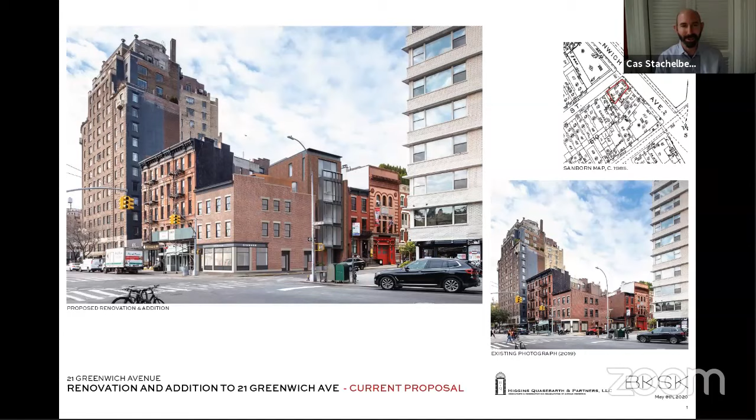I'll take you through a little bit of the background, and George will share with you the revised design. Joe Hogan is advancing slides, so you'll hear me saying next as we go through this. Joe, I'm ready for the next one.

Just quickly, a few images of the existing building on the corner. As I said, a three-story Greek Revival row house with a really fascinating stepped parapet across the top of the 10th Street elevation. The image in the middle of the back of the building shows the one-story extension, which has been changed multiple times.

The extension began as early as the first decades of the 20th century, and then under commission review, various storefronts through the last half of the 20th century. Mechanical equipment and ductwork run up the back of the historic building, which at the time of the start of the project had been coated in an asphalt roofing cement. And then a long view looking west along 10th Street toward the Greenwich Avenue facade.

Next, some detailed photos of the facade. As I mentioned, there's a comprehensive restoration program, new wood windows, repairing and restoring the wood cornice. The photo on the upper right shows an interesting detail with bluestone, granite, and sandstone lintels, which of course will be retained, so an unusual treatment.

Then across the ground floor, a restoration project for a new wood storefront, stripping the paint off of the granite piers. And the photo on the lower right indicates this low door on the far right edge of the 10th Street elevation, which we propose to raise up to match the height of the adjacent doorway.

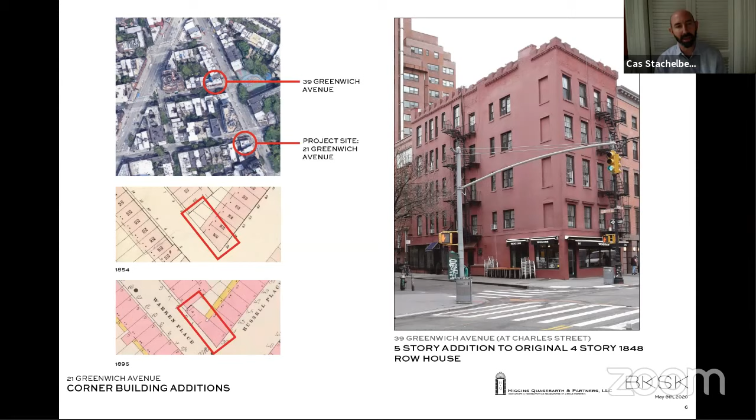Next slide. We shared with you also a series of images of commission-approved infill buildings throughout the district, which in most cases included demolition of 1- and 2-story structures, garage buildings, theaters, or residences. We share these with you to show the range of materiality - masonry, metals, glass - and the way the fenestration is handled, some small scale akin to adjacent properties, others with much larger window openings across the facades.

Next slide. Returning to our project: on the left is an image from our October presentation showing our original proposal, and on the right, our revised proposal, addressing a few things. One, the visibility of the addition and minimizing that, as you'll see in the sightline studies. But more significantly, we've studied the materiality of the new building, the addition, and also the relationship to the historic building at 21 and to the neighbors. With these revisions, we think we've arrived at an appropriate infill for the district.

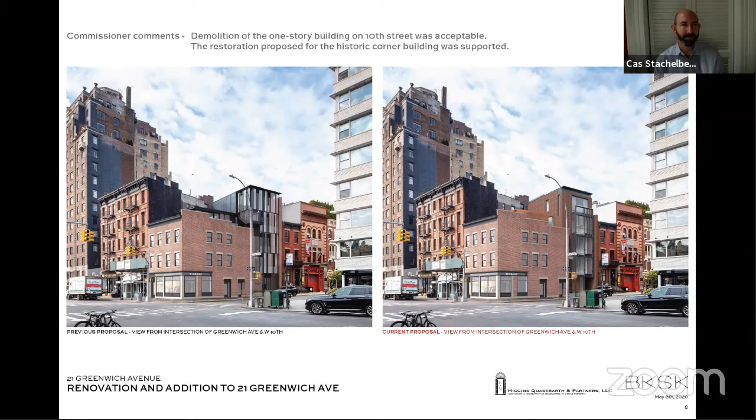George? Am I unmuted at this point? Yes, you are. Thank you.

My name is George Schieferdecker, and I'm with BKSK Architects. I'd just like to point out that Harry Kendall from BKSK is also on the call, and hopefully at the end of this, we can unmute him and ask him to comment to see whether he has anything else to say.

The 4 categories of comments we heard in response to the original proposal were, as Corey mentioned: scale - addressing the appropriateness of the proposed scale; separation - a distinct preference for having the infill read separately from the rooftop addition to the historic building; and materiality - the commissioners had a distinct preference for more masonry in the infill section. I think these first 3 comments are often intertwined - materiality and lack of separation can have a bearing on the perception of scale. In our last presentation, one commissioner felt the scale of our infill building would likely be acceptable if its materiality was altered.

So we have made a number of changes to the design in that regard. In place of our continuous 5-story metal and glass screen from the previous proposal, we have proposed a metal and glass bay window on floors 2, 3, and 4, with some minor detailing tying it to the ground level. In place of the predominantly metal language of the previous proposal, which tied into the metal language of the addition on the historic section and included the sidewall of the infill building, the bay window of the revised design emerges from a predominantly masonry mass and includes a brick sidewall in a more contextual lot line typology.

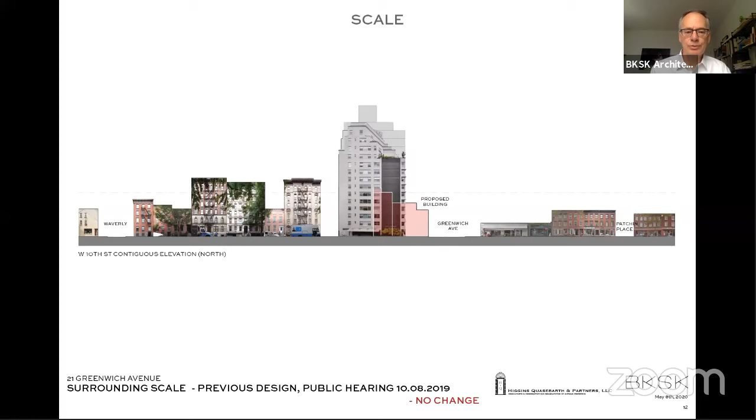Joe's going to quickly flip between one image and another to indicate some of the things we're talking about and the changes that have wrought. By flipping between the next two slides, we can sense the changes made to the design and their impact on the scale of the building relative to its immediate surroundings, and between the historic portion and the infill portion of the design. The basic mass of the building is set further back, and the appearance of height is lessened. The addition of the lower bay window modulates between the historic portion and the scale of neighboring buildings, and the removal of the overhanging metal and glass stair enclosure allows the historic volume to be more clearly articulated.

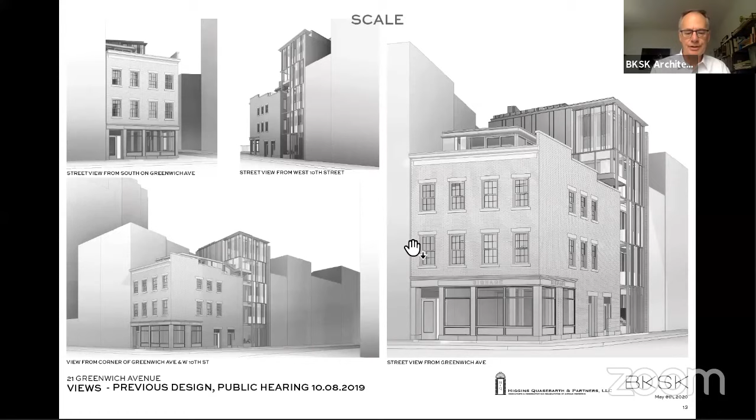Also, if we can take a moment to look at the rooftop addition as well. We're going to talk about visibility a little bit later, but I think it's also clear in this flipping back and forth that the changes we have made make that less apparent from the street.

I wanted to move on to materiality and separation with a brief preamble. Ornamental and utilitarian metal on the front face of buildings is ubiquitous in the village. It takes the form of railings, fire escapes, and balconies. The presence of bay windows of a contrasting material to their backgrounds is commonplace. The presence of a contemporary vocabulary is also present, very much in keeping with the eclecticism of the village.

And the occurrence of a bay window modulating between street planes can also be seen. So our bay window fits into all of these precedents and takes a cue from each one.

On the left is our previous proposal, on the right is our current design from a different angle. As before, the units are full floor on 2 and 3, extending from the infill section to the historic section, and a duplex apartment is on the top 2 floors.

The bay window occupies the right two-thirds of the facade of the infill in order to create what we call a reveal or indent between the infill and the historic portion. This reveal leaves the original diminutive volume of the historic portion clearly articulated by recalling its original rear wall and exposing its rear corner.

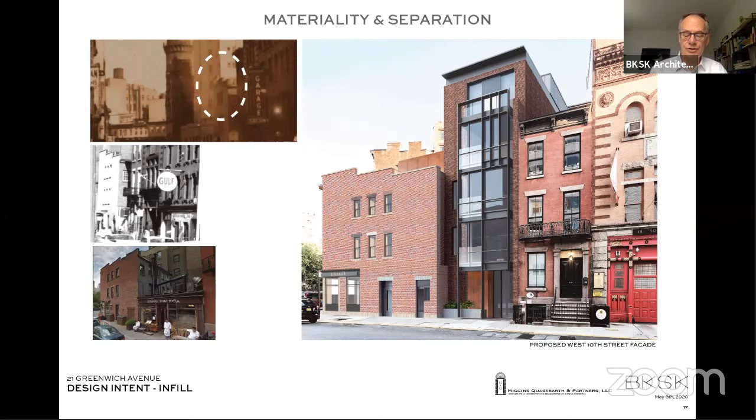The historic facade on 10th Street has always been of interest to us as an unusual expression, with its very prominently stepped parapet. In some of the historic photos, that stepped facade appears to extend up above the rear wall, and the rear wall is defined differently, either by a parging or simply a shadow line, resulting in an expression of the side wall as a simple plane of brick. In other historic photos, the middle one in particular, the emphasis is on the return of the brick on the rear wall. We have chosen to express both conditions at the corner of the historic portion.

The bay window of the facade is the canopy for the entrance at the first floor, an extension of the living room of the units on the second and third floors, an extension of a bedroom on the fourth floor, and a balcony off of the master bedroom on the top floor.

On the second, third, and fourth floors, the glass section to the left of the middle is a door that opens inward, with an acid-etched railing sitting outboard by about 3 or 4 inches, carrying over to the left edge of the bay. The right side of the bay is floor-to-ceiling glass at the second and third floors, and an acid-etched sill level with vertical fins at the fourth floor for greater privacy, where the bay is part of a bedroom.

On the back wall at the very top floor, there are two glass panels, left and right, and a solid spandrel panel in the middle.

The bay appears to be pulled out of the masonry mass of the building, and the masonry return at the bay is metal, matching the profile of the surround at the leading edge of the bay. That framework extends to within a few inches of the ground to create an entry zone. The bay also pulls back from a brick fin wall at its western or right edge, making it clearly a 3-sided glass box with space to either side, putting anyone standing in the bay fully outside of the main mass of the building.

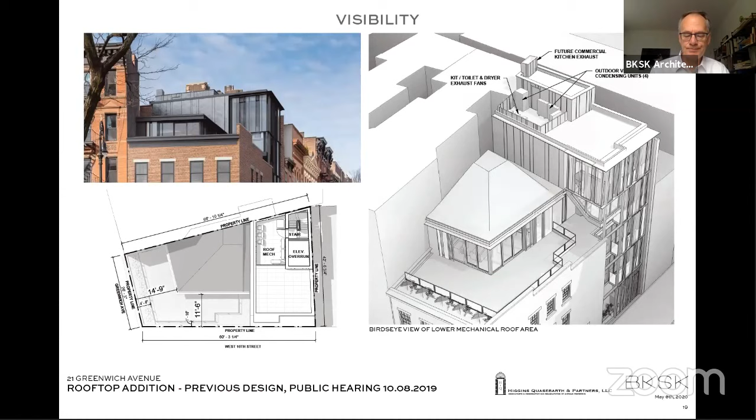The previous proposal had turned the corner with glass and metal and opened up the infill portion to the rooftop addition. The current proposal creates the equivalent of a masonry lot line condition with limited openings. This move responds to a preference for more brick on the infill and more separation of the historic from the infill, so that the infill reads more like a separate building than an addition.

The brick of the infill portion was deliberately chosen to be at variance with the existing brick of the historic portion—it's a deep red-brown molded brick. The metal work of the bay is a charcoal gray toned metal with a substantial fin expression at the bay window, giving it a similarity to the thinness of steel. The side of the rooftop addition is copper, meant to be patinated to a deep bronze tone. While the previous proposal sought to unify the rooftop addition with the infill, the current proposal emphasizes separation between the two, materially as well as volumetrically.

The only nod to the buildings being tied together in plan is a repetition of the patinated bronze-toned copper of the addition at the side of the entry to the residential portion of the building. Other materials shown include the granite at the base of the building and at the planter by the entry, the acid-etched glass at railings and certain glass surfaces, and the metal panels, including the metal panel of the bulkheads.

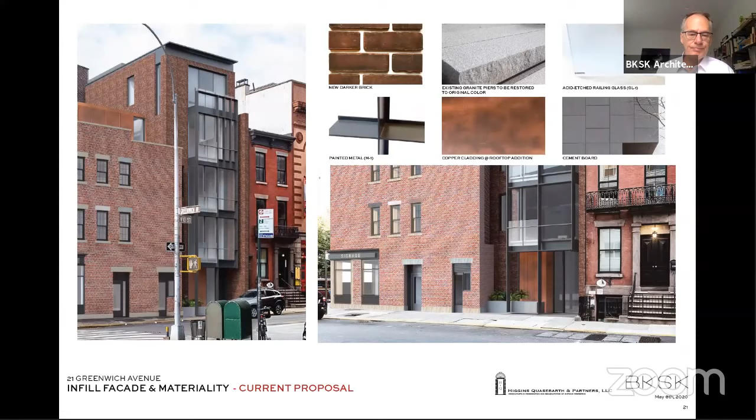Following other views of current and previous schemes—from the south on Greenwich Avenue, the rooftop addition is less in evidence in the current scheme, as it has been set back further.

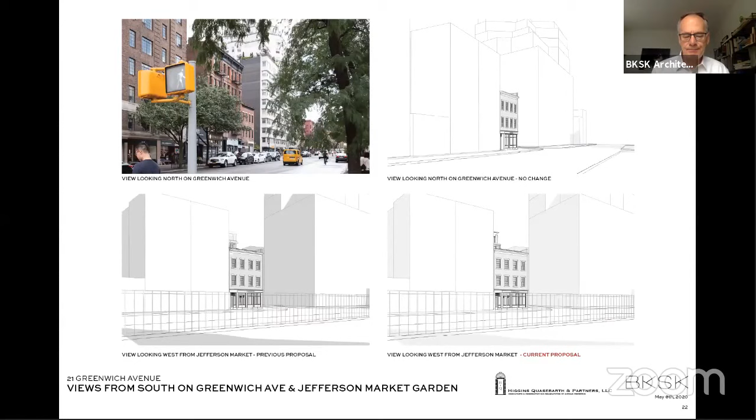From the east, the rooftop addition appears lower because it is set back further. The current proposal also shows its brick lot line wall.

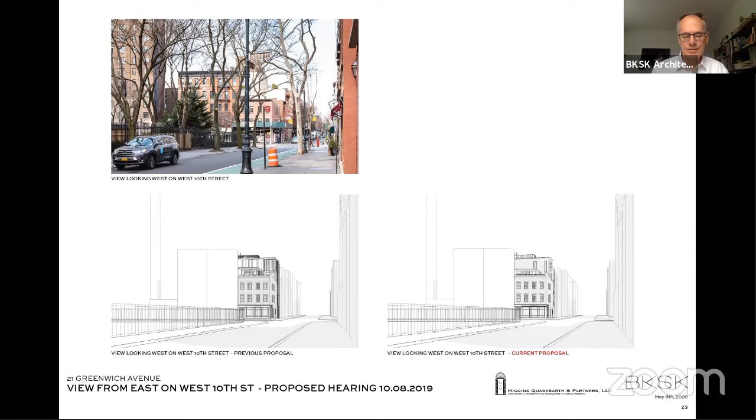In conclusion, what we have done with our current revisions is address the commissioner comments about scale by breaking up the volumes of the facade and reducing the impression of height by setting back the main volume of the infill, while maintaining the 5-story height of the infill, which we feel is well within the scale of the context. Separation and materiality by preferencing the reading of the infill as a separate building with a lot line condition, giving it a predominantly masonry appearance with a different tone brick from the historic, and allowing the volume of the historic portion to assert itself. And third, decreasing the visibility of the rooftop addition by increasing its setback from Greenwich Avenue and simplifying its form and material expression.

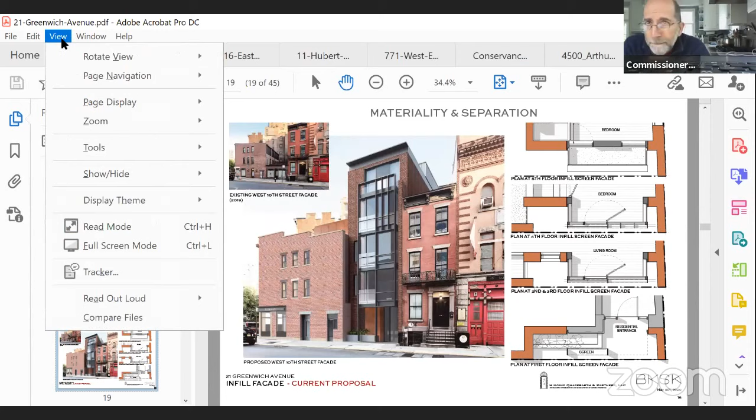So can you just go back to the plan view of the balcony detail? I just want to understand your intention with the relationship between the balcony element and the townhouse to the right, the west. So it's set back a little bit from the townhouse to the west, right? Yes, that's correct.

Okay, so as I'm looking at it now, I realize that there's one slight mistake in that plan, and that the brick fin wall to the west appears to continue up, but it does not go up the full height of the building. It only continues to the level of the balcony. Right. This question occurred to me now.

It didn't in a previous scheme, because that scheme is quite a bit more contextually intending to be contextual in a more, I guess, traditional way. What set for you the plane of the brick in your proposal? Where did that plane come from?

The plane of the brick was both set back so we would get a kind of dimension that allowed the corner of the historic building to read, that the sort of balcony and bay window depth appeared reasonable, not overly sized, but enough to be sufficient expression. So I think it's those dimensions that essentially set that back, those thoughts.

Okay, and last question: your rooftop addition, looking at it in light of many other rooftop additions, is relatively opaque on the 10th Street side. Explain to us why you made that decision and why that's a good thing.

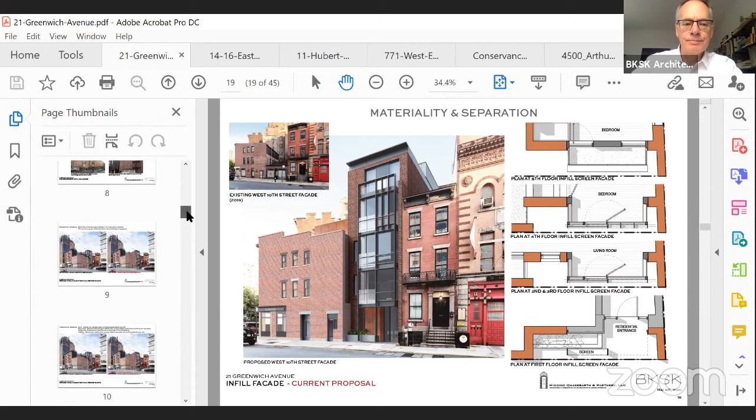Okay, and finally, if you go to your south elevation - well, we literally don't have a south elevation, we have an east elevation. There's two - the front, you did a lower one. You had an elevation looking south that showed your building with the whole block. Yeah, you're talking about the corner perspective image from the corner. It's a line elevation that you drew, a block and the building's elevation, were in white. Oh, a block elevation? This is it, there it is.

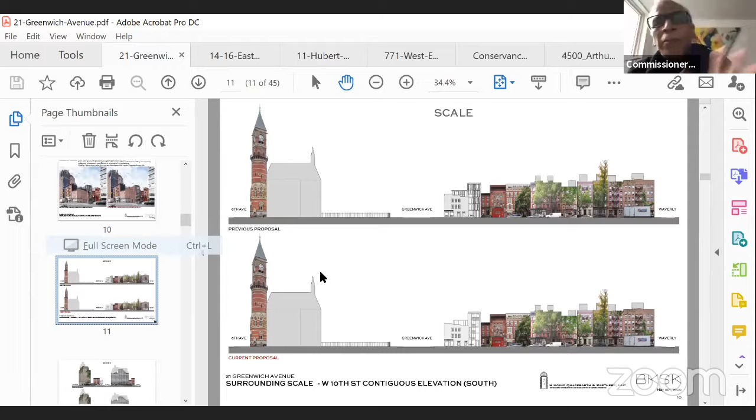And the question there - I think this is really much improved. I was just feeling you have a volume in the corner, you have the volume infill. The connection on the roof seems to belong to neither. You have A, B, and C, and I'm wondering why the penthouse doesn't relate to the historic building more precisely. So you have volume A and volume B - what's the idea of the overlap that we see in the elevation? You see the ambiguity between, it becomes a third element, if you will.

Well, I think that many rooftop additions in the village end up being either studio or bulkhead-like, and generally of a slightly different quality than the main mass. I think what we tried to do essentially was, when we look at a head-on elevation, obviously we see a lot more of it than we would when we're looking from the street.

In the street views, we simply wanted to make it discreet, set back. And then we liked the notion that it had a very subtle relation to the new proposal and design by taking that material and bringing it down close to the entry - something that perhaps the street observer might not necessarily notice, but certainly our residents would get a sense of as they grew to understand their building.

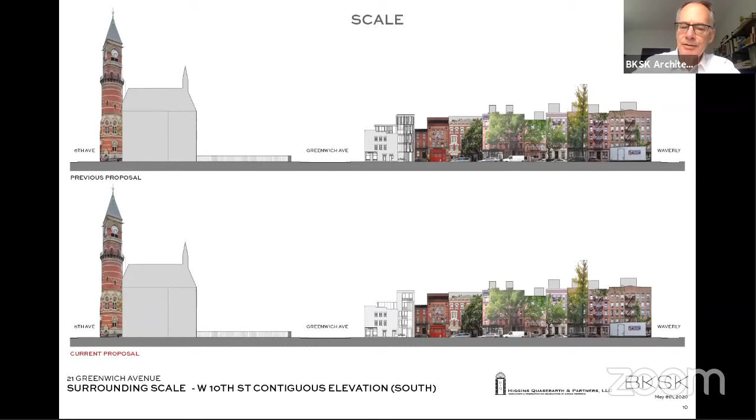I think the main perception from the street would be of the historic building, its bay window which has volume and mass to it, and the brick infill that the bay window comes out from. Those are really the three elements that I think create the overall impression of our building on the street.

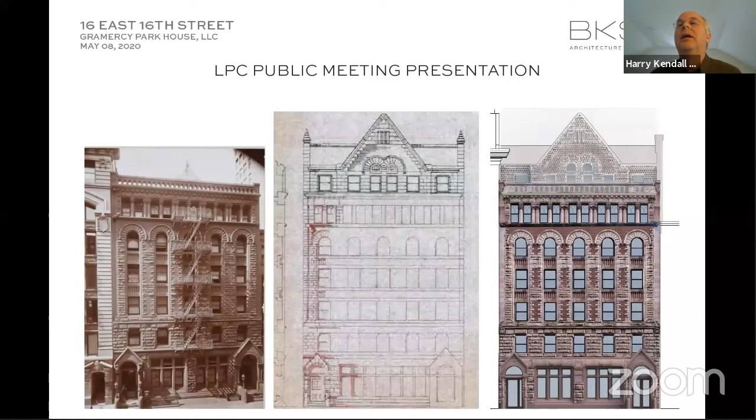Of course, our project also involves the restoration of the ground floor, extensive reworking of the interior, expansion of the building to the rear, and these upper floors that I mentioned. Next, please. Todd will be controlling the computer, so I'll say next when we move to the next slide.

As Corey said, there were a number of commissioner comments. It was a very productive public hearing discussion, and I think you'll see that you've provided us with a roadmap for addressing these issues, and we return to you with a much improved building. We'll start from the ground floor up, but the five topics we've identified that contain these comments are: the ground floor restoration, the massing and visibility of the new upper floors, the overall form and typology of the building, a small but important issue of the neighbor building's cornice, and lastly, the crowning element, the gable screen, the fanciful roof.

We've developed a significantly different set of details, and we're very excited about it. So next, please.

The ground floor restoration - you asked us to look harder at the historic drawings, and we did. So here on this four square sheet, on the upper left you see the zoom in on the historic photograph, one of the historic photographs.

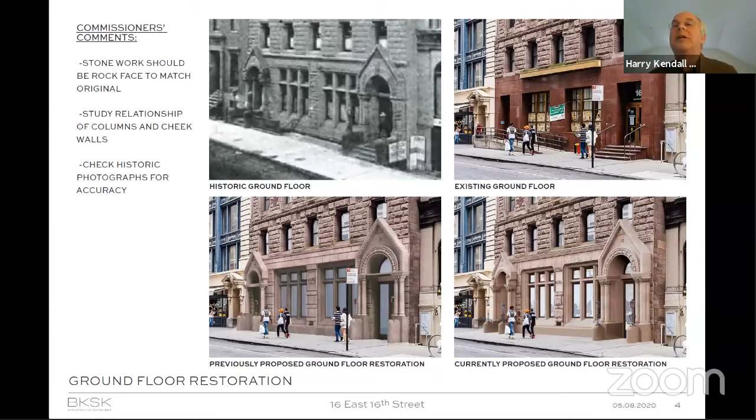So we can go on to the next, which has just a reminder of some of the intricacy and general mastery of detail that the existing stonework has.

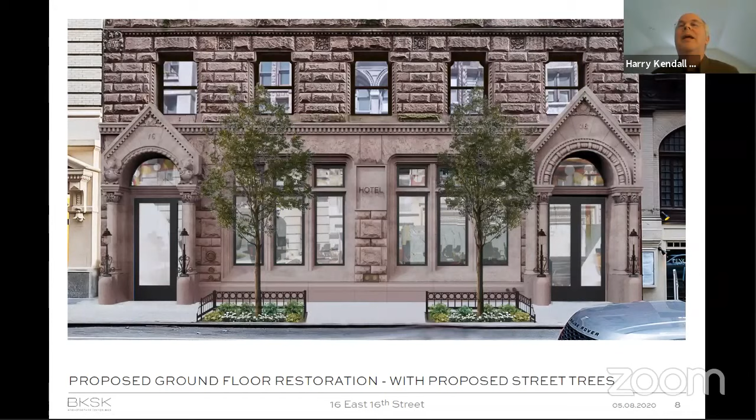And next, you can see the depth and intricacy of the historic facade. We have studied carefully what's there now - very little - but also the photographs, and we think this really accurately reflects its robust masonry presence.

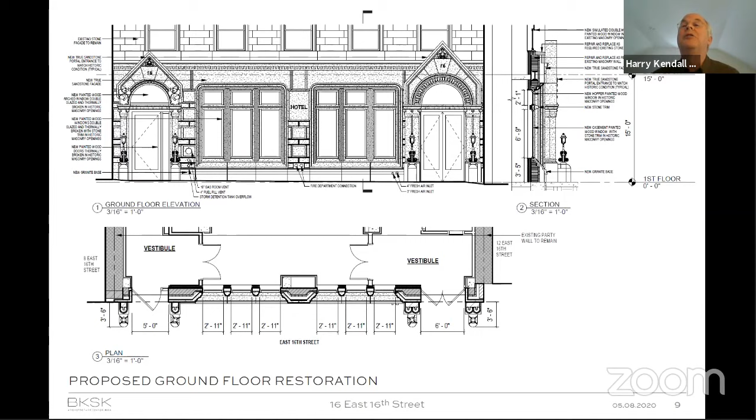So to us, that's the most obvious first step, but an important one, especially if we're trying to honor the mastery of the original architect, both by his composition at the base and his composition at the top, which we'll get to at the end, which Todd will be presenting. So next, please.

The massing and visibility comes next, because you're standing on the street looking at the facade, you crane your head upward and you see the new rooftop. And next, please.

We were asked how we know, because we only have an elevation with a tiny bit of section on the side - it's an incomplete set of drawings, to say the least. We are asked how we know it wasn't a false front, and that it wasn't just the roof and then the building shrunk back down to the size it was built.

Well, we know that in a number of ways. Most importantly, the reason it wasn't realized is because a dormitory wasn't allowed to be more than 6 stories, and he was proposing a 7th story plus an attic, so that's why it got turned down.

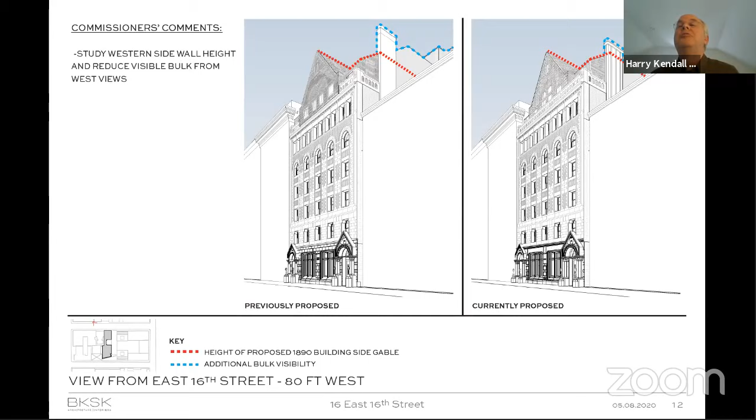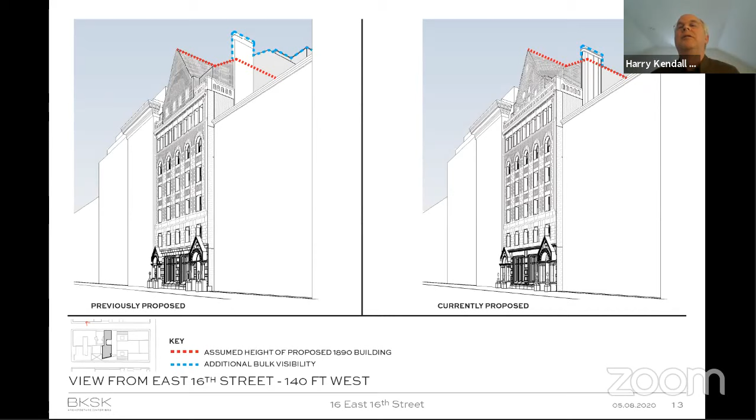As you back away from the building, or walk further down the sidewalk, the visibility only diminishes, as it did in the previous proposal. But the lack of visibility of anything above that presumed bulk line continues, and as you get to the last point of visibility of anything behind the chimney, at 220 feet west, there's no further visibility.

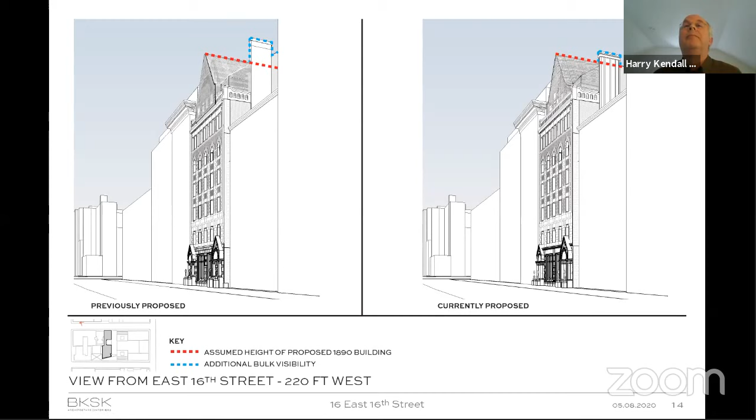To make the bulk sectional drawings clearer, here's the section on the left of our previous proposal. On the right, you can see the reduction of bulk on the side wings of the front face to a 7-story piece in our newly proposed building. It remains 9 stories in the south or left half of the building, and the connecting core is also 9 stories between them.

The mechanical bulkheads and equipment are shown in both these sections, the amount of which is not at all visible from the street. The bulkheads have been lowered, the mechanical equipment has been reduced, and in general this calms the whole composition down and makes it more coherent, we think.

In this next sectional drawing, it's essentially the same drawing, but we've stripped away the mechanical equipment just to show the bones of the building: the 7-story piece, the connecting 9-story core, and the 9-story back portion of the building. We'll also comment, in a minute, on the skylight in the courtyard above a full ground floor.

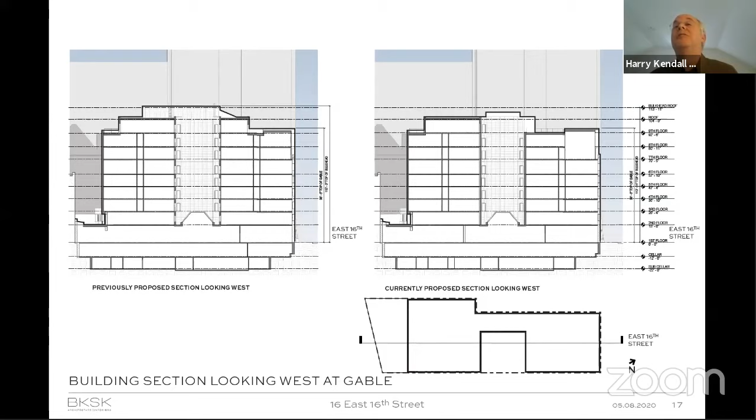There was a comment previously, and Todd will focus on it and show a rendering from that interior, but there was a comment that if going to the effort to create or recreate this unusual element that was in Robertson's mind, it would be good if it provided a special function, and we've found a way to do that.

The third issue relating to visibility, going into a more conceptual direction, is the overall form of the building. One of the most interesting things about the public hearing discussion was the recognition that making a hotel in this historic structure involves a good deal of demolition, expansion to the rear, and additional upper floors.

There was a robust discussion about how much demolition is appropriate, and a suggestion that we be attentive to the typology and formal aspects of how the new building relates to the architect's original conception and to the typology. So on the top, you see a diagram of the original building.

It extends roughly almost 100 feet into the middle of the block. It has a courtyard for the dormitory rooms that is roughly centered on that 100-foot deep block, and it has a somewhat large rear yard, certainly very large for the Ladies Mile district, with a one-story connecting piece to a program element, a single-story building shared with the next door YWCA.

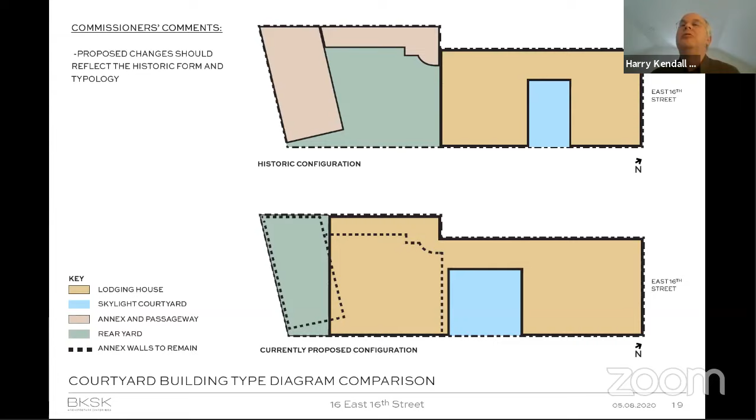On the bottom, you see a diagram of our proposed building, and typologically it is very akin—it just solves a different functional need. So it now extends about 175 feet deep into the block. It has a courtyard that is roughly centered on those two blocks, and the connecting link in the single-story building remains evident inside the building and extending into the rear yard, which is an as-of-right possibility in the proposed new building.

When we speak of a typology, it doesn't just come from a love for a certain typology—it comes from the functional requirements. So this is those same diagrams, altered here to show that the location of the original courtyard, which has a skylight and a full ground floor below it with more public rooms, has a location responsive to the size of dorm rooms and the location of bathrooms that the original dormitory use mandated.

Our proposed hotel has the same configuration, and as was made in the previous presentation, in a way that the health center this building became never did, the front facade will be animated by individual guest rooms reflective of the original design and use. But the rooms have gotten a little larger, the bathrooms connect directly to the rooms as a hotel needs, so it pushes the courtyard back, making it the same functioning element but satisfying a different group of functional needs.

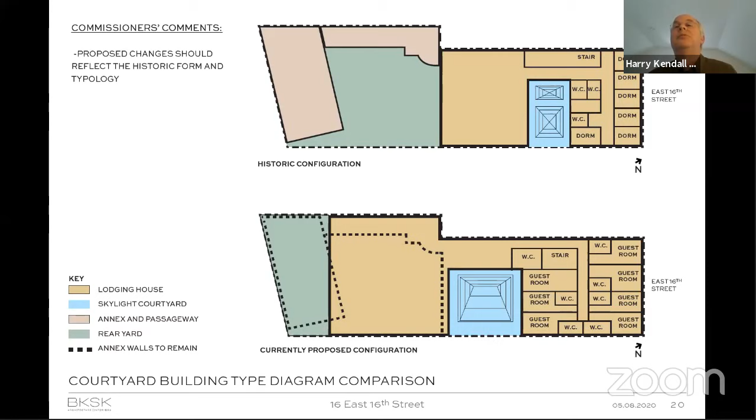Sorry for these pauses. So Harry, I think it's okay. Harry, yes, I think the comment from the commissioners was just to have you discuss a little more about the required removals at the rear. I think everyone understands that the program requires a deeper front and a courtyard shifted back, so if you could just quickly get to the extent of the removals, and then we can move on to the design of the addition in the front. Absolutely, absolutely.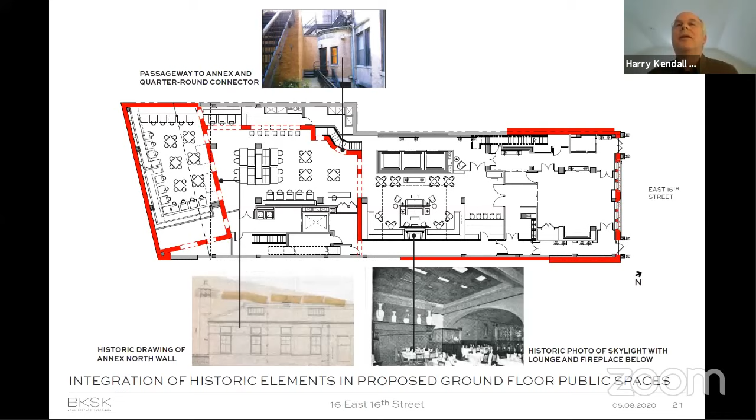These red walls show the elements that are going to be retained. Quick orientation so you understand all this in three dimensions: this image is the original building with its courtyard and the rear outbuilding.

The next slide highlights a number of changes that have happened to this mass over the years, both in the early part of the 20th century and the changes in the 1950 incarnation as the health center. So this existing form has been heavily compromised on the ground floor, but also has a number of additions in the rear.

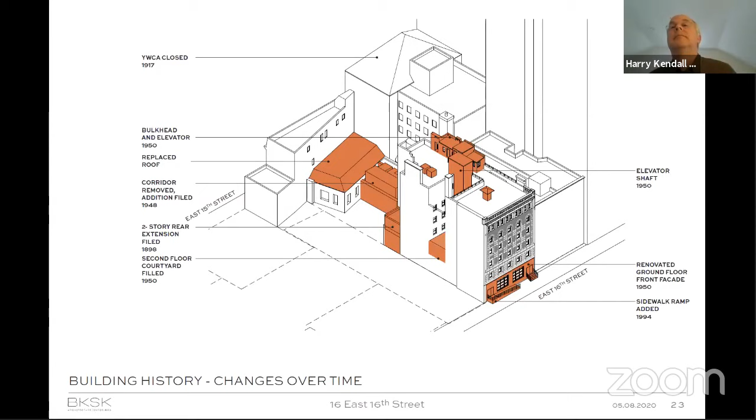And so this now represents in a three-dimensional way the walls we're keeping—of course the front facade, the side walls, 86 feet deep on the eastern side and 45 feet deep on the western side, and then in the somewhat darker gray in the back, these are the walls we're keeping that allow a perception of this progression back through a masonry link to a masonry wall building.

All of which was designed by Robertson. Now, on this drawing, I want to pause for a minute because we know the commission has received some letters in opposition from the neighbor to the east, from the owner and from some occupants, pointing out in their view the inappropriateness of closing the lot line windows. So I want to pause for a minute and look at our neighboring buildings.

First, in the drawing on the left, you see that the YWCA on the upper left, now the Buddhist temple, has a blank side wall with no fenestration, and where they had necessary windows, they recessed the wall to allow those windows to remain sacrosanct.

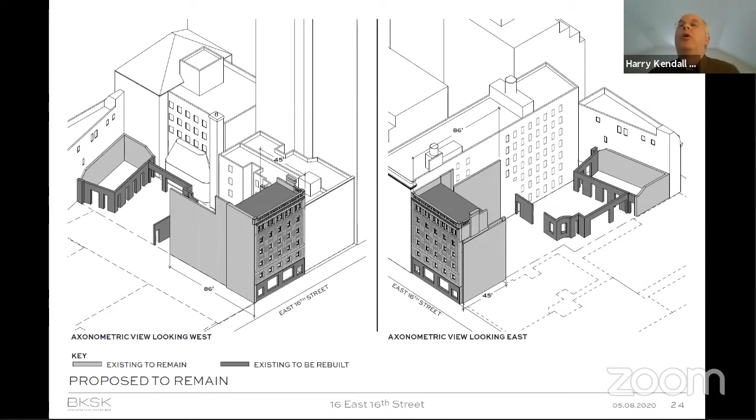So we want to point out, this drawing shows what we're keeping. It also highlights what is being covered over by our extension to the rear. So next, please.

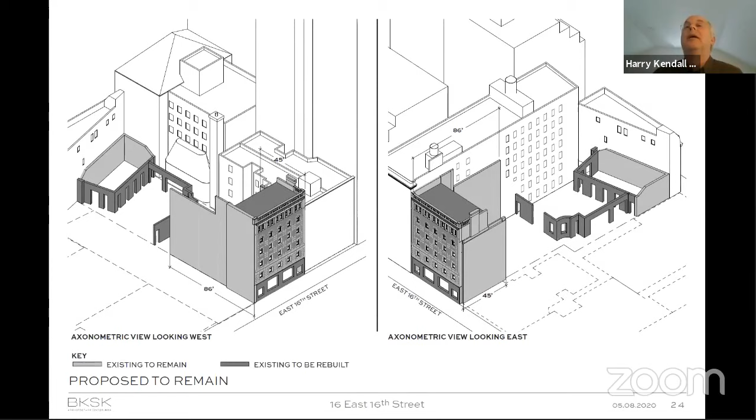This is a section drawing on the left showing most of the lot line windows. There, another row goes behind a little carved out corner of the original historic building. And on the right, our new section showing that there are 4 lot line windows remaining that lead onto our new courtyard. Two other points to make very quickly.

The lot line windows are not mentioned in the designation report in any way. And secondly, and more importantly, our client met with the owner of the adjacent building last year and showed this exact drawing. They chose not to come to the public hearing either for the community board or landmarks, and they've been voicing these concerns more recently. So next, please.

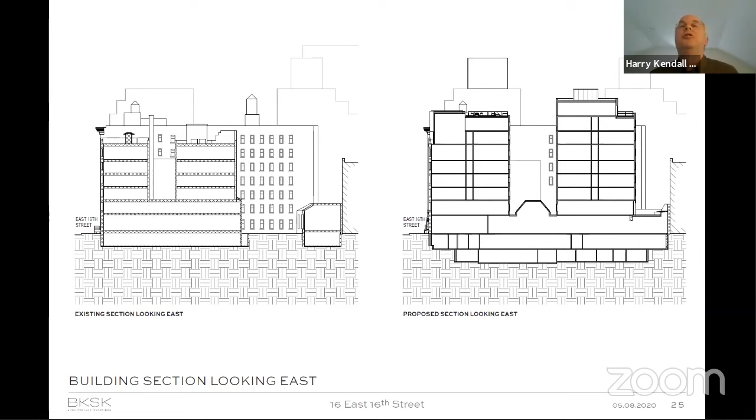To sum up the form and the typology section, we just show an axonometric showing the previous proposal, which will come up, there it is. On the left, the previous proposal. On the right, the current proposal of the courtyard building with a number of historic wall retained and a reduced bulk on the street face.

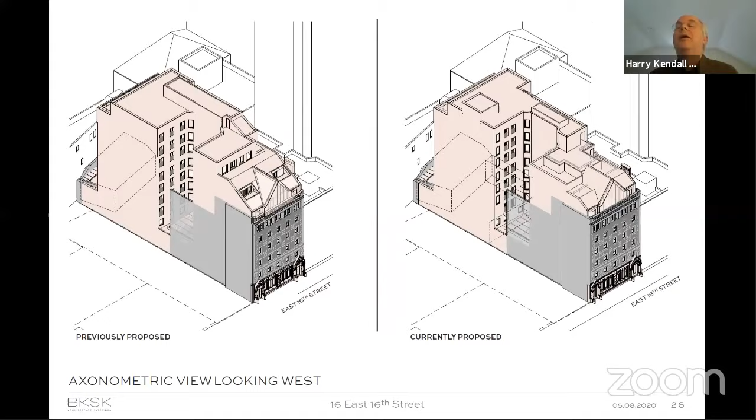So that's those first three topics. I'm now going to turn it over to my partner Todd, who will discuss the topic of the adjacent cornice and then end with the rooftop language we're proposing. Thank you very much.

Okay. If you can unmute Todd. Oh, I think I have to do that myself.

Hi, I'm Todd Poisson, partner at BKSK. So the adjacent neighboring cornice at 18 East 16th is directly east of us.

Okay, the last chapter is about the design of the proposed gable rooftop enlargement, and particularly the nature, the material, and the details of the rain screen, and location of the rain screen we propose to clad it with. This is where the commissioner's comments really led us to a kind of a design breakthrough that we're really excited to share with you.

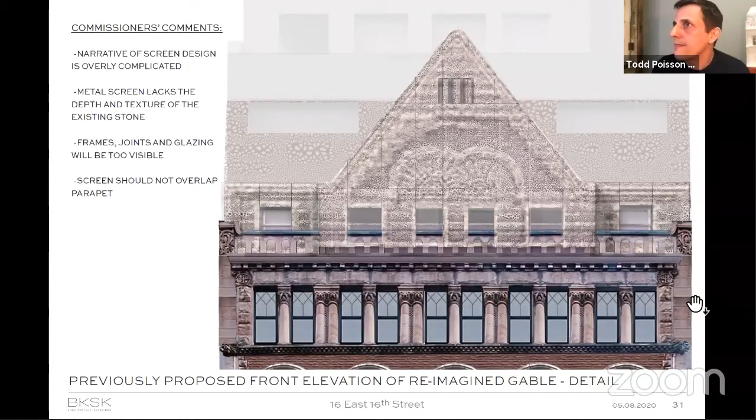We also took cues from the diagonal window mullion tracery of the 6th floor to produce a pattern of two interweaving layers of ductile, incorporating the organic nature of the masonry details and the linear organization implied by the X and Y shaped diagonal pattern of the tracery.

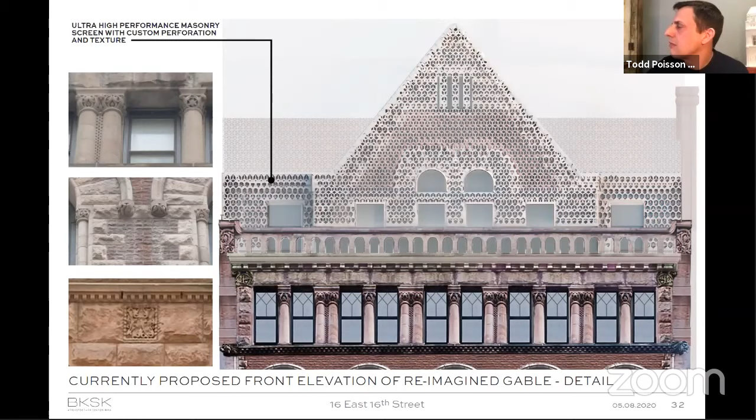When seen directly across the street, the new roof profile completes the triple pediment composition that Robertson originally intended, now with corresponding materiality, texture, and color.

The screen has been pushed back 12 inches from its previous location, allowing the existing parapet to be unobstructed. The central gable was pushed back 12 inches and the two lateral wings were pushed back 17 inches. So the whole composition appears a bit smaller from this perspective, but it's actually the same height—it's just pushed back.

There are two tones of color in the masonry screen: a lighter shade where Robertson intended sandstone, and a warmer, darker tone where he intended brick, recalling the warm color of the textured brick around the 5th floor arches and the zones between the windows visible on the 3rd and 4th floors.

Where Robertson intended brick in the gable, the darker, warmer tone appears—both colors exist in the screen, with the reddish tone on the outer layer and the lighter tone on the recessed layer. Each layer is 3 inches thick, so the screen itself is between 3 and 6 inches thick, depending on the specific spot you're looking at. Both layers are cast together as one integral screen.

The reddish tone is achieved by a high performance stain over the lighter tone, which is cast into the body through the whole screen. The larger window-like apertures in the screen have 12-inch Ductal returns, including at the lunette windows, which we interpreted from Robertson's arched blind niches in the drawing. These deep returns match the deep set window returns in the historic facade.

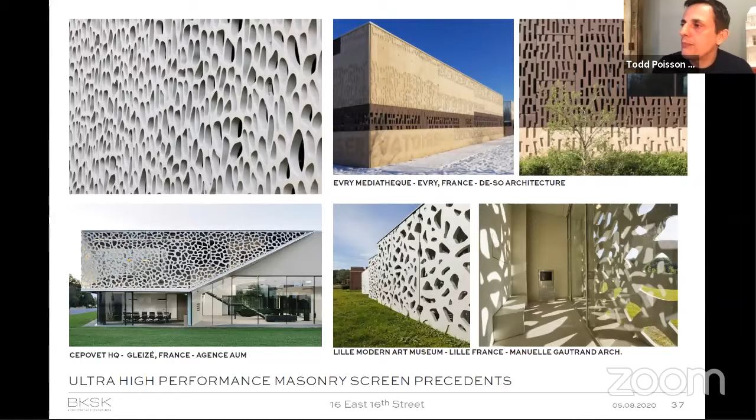The flat surface, as a result of being on top of the casting mold, gives an entirely different effect to the interiors than the textured exterior face does to the exterior. And a close-up of the 6th floor sandstone capitals and webbed screening is at the right.

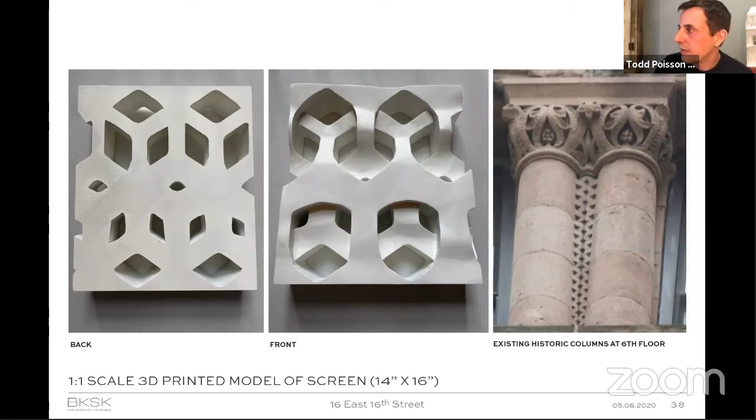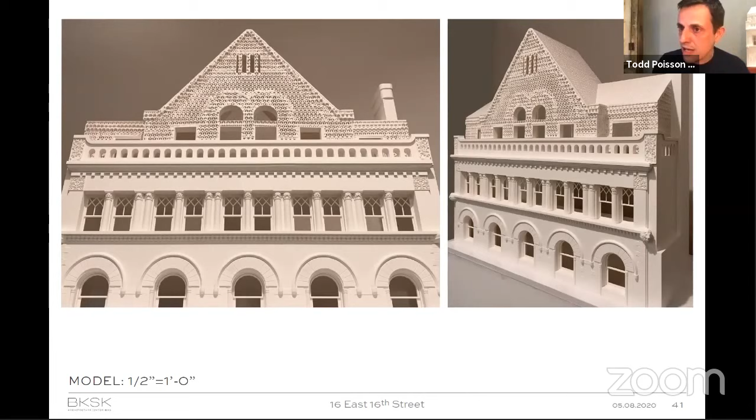The model, unfortunately, doesn't capture the real texture of the sandstone above the 6th floor windows or the crazy velvety brick texture between the arches of the 5th floor, but it does start to capture this beautiful floral decoration carved into the sandstone at the bookends of the parapet and the bookends of the 6th floor entablature, hinting at the marrying of textures we're trying to accomplish here.

The interior space is behind the screen, as Harry hinted at. It could be rented as a combined private suite or quasi-public event space. Last time we saw you, we had the floor slab, which Harry mentioned, hovering in the middle, interrupting the space, and there were comments to explore something like this instead. Our client has been very keen on the potential of art shows and other events in the space, so we're really happy to take that note.

In section, the glass enclosure is 30 inches behind the back of the parapet, and you're going to see that in a section coming up on the right.

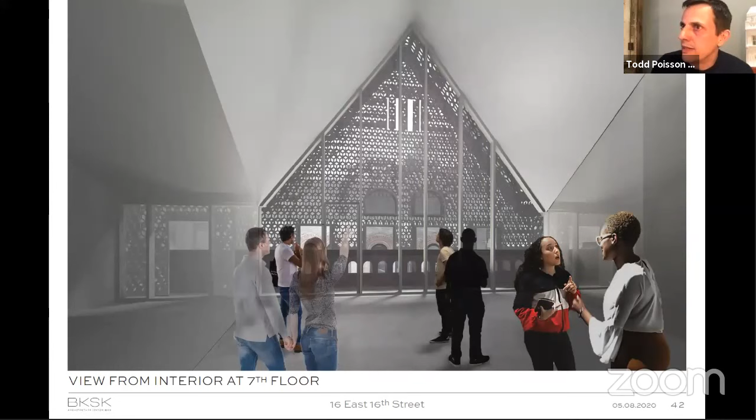There are steel outriggers lining the pediment frame roof line, from which the Ductal screen is hung. Even though the Ductal screen is much heavier than the metal screen was, there's no framework attached to the back of the screen. We only have these small stainless steel brackets projecting from the glass walls, structural mullions, to counter wind load. There are only 5 panels in the gable face.

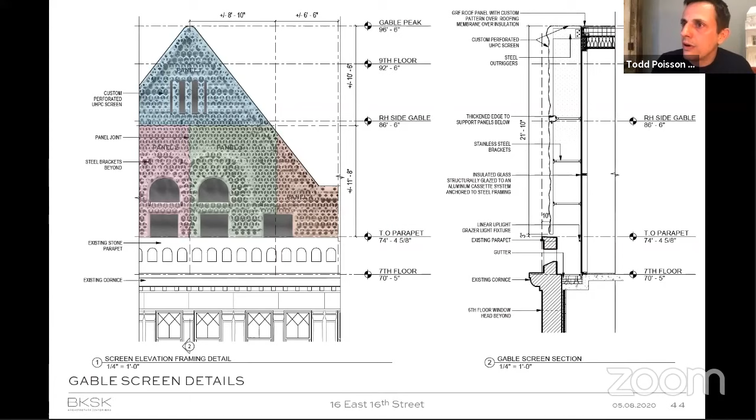They're colored differently here just to illustrate their sizes and joint locations. The pink and green panels hang from the bottom of the blue panel, which in turn hangs from the perimeter outriggers. So even though we have some joints, a lot fewer than before, they're disguised with painted sealant in the lap joints. The joints are painted out, and the joints themselves are lap joints, so depending on the time of day, there's no light or dark lines in the screen.

It appears monolithic. The gap behind the parapet, from the backside of the parapet to the glass enclosure, creates a gutter that is accessed through those 3 portals in the glass that we saw a second ago.

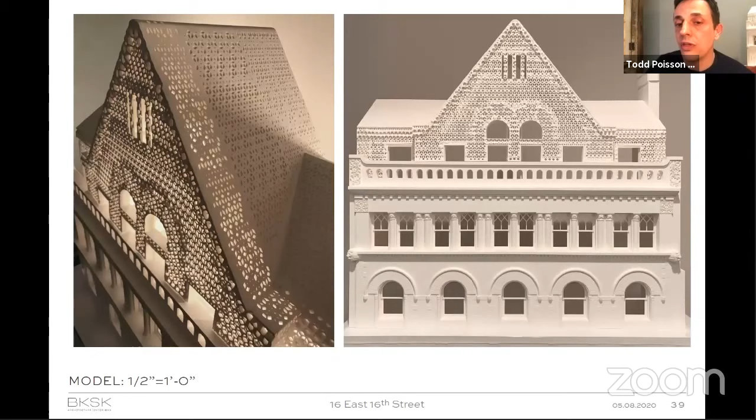So yes, to both. They exist now in the neighbor's building. They're lot line windows of 18 East 16th Street. As Harry explained, they were popped in when they extended their building southerly here. I hope it doesn't go further than that.

The eastern neighbor used to only be as big as the party wall, the ghost of that 1853 house that used to be there. In 1907 the new owner extended, as many Ladies Mile buildings did, to occupy the whole deep site. As Harry pointed out, they did not choose to recess these windows as the YMCA building did. Ironically, the YMCA building was connected to our building, but even they recessed their windows and did not choose to put any windows on the lot line itself. And the tenement building, as Harry pointed out, has windows which were set back too.

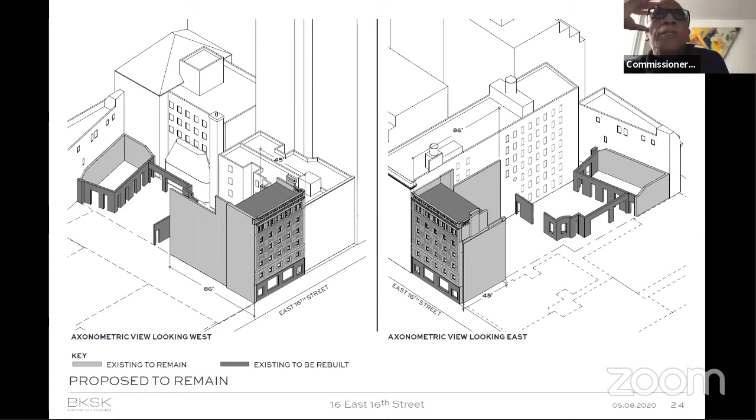Just a question, the tenement building is rental? Just rental apartments, that's what it is? This one's rental residential. The long building here is a commercial building. And the back one? The back building that faces on 15th Street is residential. They have a few windows that look out onto our rear yard and they will continue to. So just to confirm, the long building is commercial, not residential? Correct, this is a commercial rental building. Okay, thank you.

Okay, not seeing any other questions, I think we'll move to our discussion now. Commissioners, as you recall, the last time we saw this application we had a very long presentation about the planned program and development here, and there were really 4 outstanding issues. One was we asked the applicants to look at the level and detail of restoration at the ground floor of the front facade. We asked them to consider the amount of removal behind the facade. We asked them to reduce the massing and visibility of the addition from the street.

We also asked that they consider the materiality and details of the screen. While many were intrigued with the idea of the screen as an abstract kind of ghost or expression of the original design drawing, there were concerns about the metal material and the transparency of it. So they have revised that to be a masonry material with new details, which they've presented today. So with those 4 concerns as the context for the discussion here, let's go ahead.

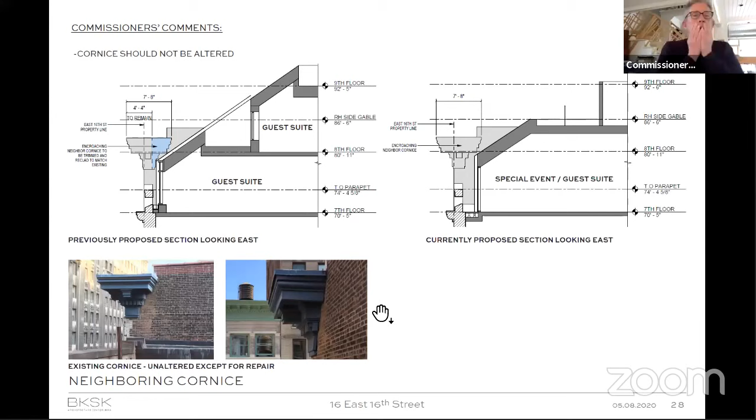And Commissioner Bland, why don't we start with you? All right. Well, I think this is very intriguing. Oh, excuse me, sorry, Brett, I'm just cutting you off.

I do want to turn to Rich to note for the record that we did receive some letters, which have all been shared with the commission. Rich, can you just note for the record what the letters are? Yes, so LPC received letters in opposition to the project from 18 East 16th Street. A letter was also received from the local council member's office recommending denial, to allow the applicant to address the neighbors' concerns. And Borough President Brewer issued a letter asking the commission to delay the public meeting to facilitate conversations between the neighbor and the applicant. And as you heard, the applicant has addressed the issues related to the neighbors' windows.

Okay, so now Commissioner Bland, let's go ahead with our discussion. Thank you. Well, I think this is an exciting proposal, and like the applicant stated, I hope that this project proceeds in our post-COVID era. It would be wonderful to have this project move forward.

I think I was probably one of the ones that was intrigued by the idea before, with the roof articulation, but I think it's come a long way now, and I'm quite intrigued by this notion of using the masonry screen material as opposed to the metal. I'll wait for others to weigh in on this, but Sarah, you used the word ghost—I think that's an appropriate way of seeing this, particularly since you can see through it in the evening in a different way. I think it's an intriguing adaptive reuse of this really handsome building.

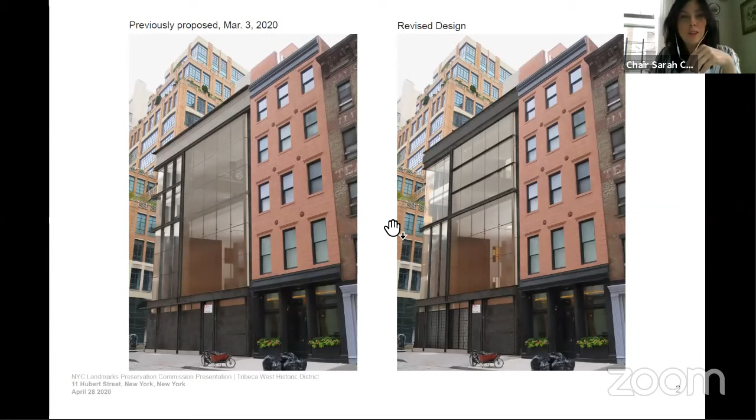Okay, good morning everyone, good morning commissioners. Ward Dennis with Higgins Quasebarth. I'm joined by Eric Cobb, the project architect, Peter Belsinski, and Lake and Cole from my office. Corey summarized the comments from the last public meeting in March. In response to your comments, we have revised the proposed design for both the cornice and the glass facade on Hubert Street. We have also continued to refine the details for the shutters at the base of Hubert Street, and we will show you those new changes. So this is a proposal for a new building at the corner of Collister and Hubert Street in the Tribeca West Historic District.

The proposed new building is a modern design that uses a simple palette of materials to explore depth and planes within the narrow construct of a New York City building site. At the last public meeting, we were asked to restudy the design of the cornice and the treatment of this wider area of the glass facade at the western portion on Hubert Street.

As you can see in the image on the right, we have changed the cornice to match the material and scale to the historic cornices on Hubert Street, and we have broken down the upper portion of the western glazing into major and minor steel mullions. The major divisions in the facade follow the interior program with a major cross, and the areas of glass within are further broken up by robust steel fins. These changes are in keeping with the original compositional goals of the design and enhance the subtle play of depth, texture, and planes of the facade.

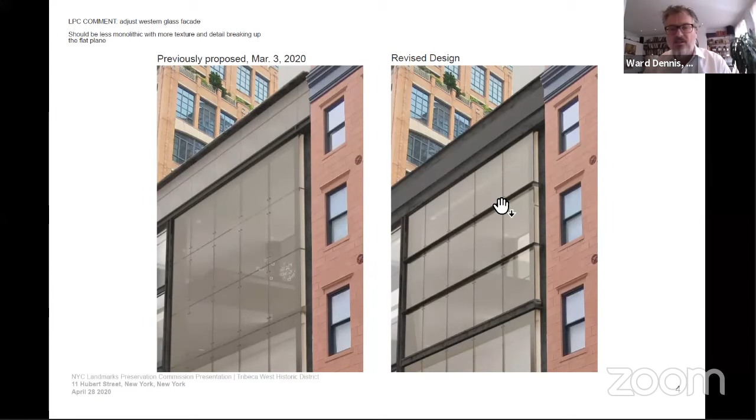What is shown here, this horizontal where my hand is now, is a 12-inch tall steel channel at the floor spandrel between the upper and lower section on this area of the facade. And then above, these are 8-inch deep by 1 1/4 inch tall steel fins. We'll see details of both of these in a moment.

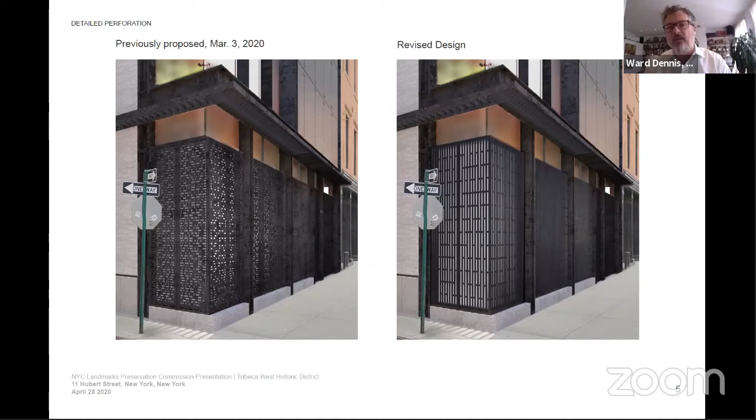As I mentioned, we have continued to refine the design of the shutters at the base of the building. The latest design is shown on the right. These recall shutters found throughout the Tribeca historic districts, and they also allow us to have both privacy and light coming in and out of the building, because this is a residential building.

And I'm going to ask Eric Cobb to come in for one second and show the sample of the C channel that we have. Eric, are you unmuted? Yes, thank you, Ward. Can everybody see Eric? Yes, can you hear me okay?

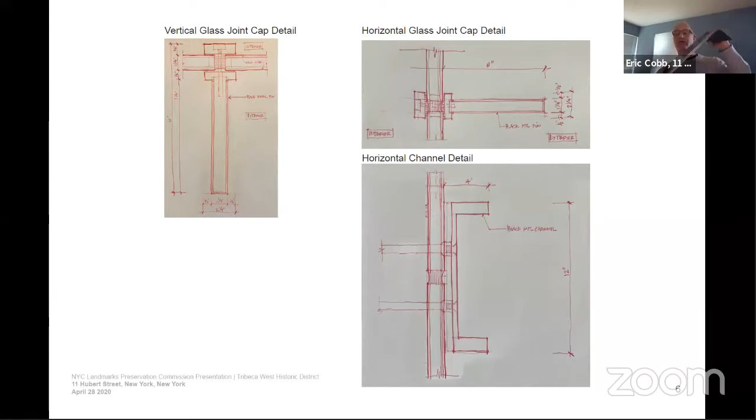Okay, go ahead. The C channel is 12 inches in width here, with a 4-inch profile. This same channel is used horizontally and vertically for the cross members on the facade. The 8-inch fin - this sample is only 1 inch, but we would actually be 1 1/4 inch. This is the scale of the projecting fin, also used horizontally and vertically.

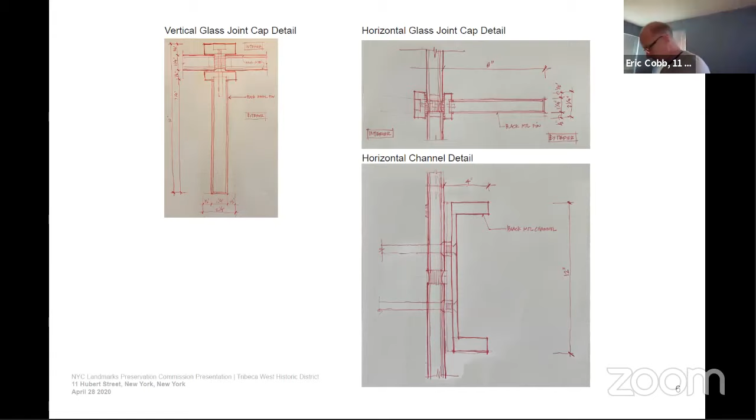Thank you, Eric. Is that the conclusion? I was just going to summarize with two different views, if I could. Okay, please go ahead.

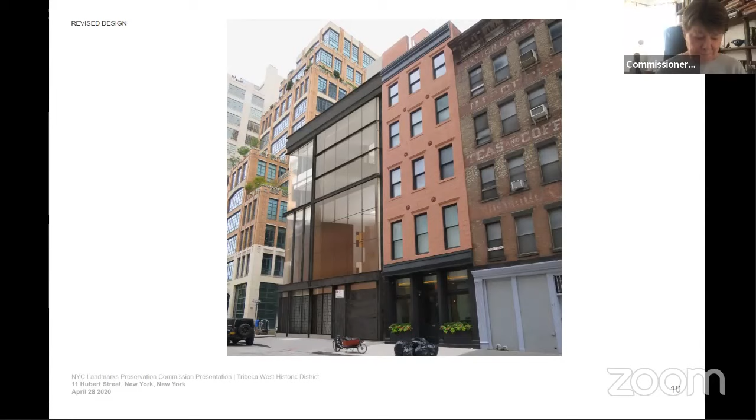Commissioner Lutfy: I agree. This has been quite a journey from where we've started. Especially at the beginning, all of the commissioners had a lot of problems with this design, and we've sent the applicant back more than once. This is the third time they're back. I want to thank the applicant for doing everything you could to address our concerns, and I think you have been successful.

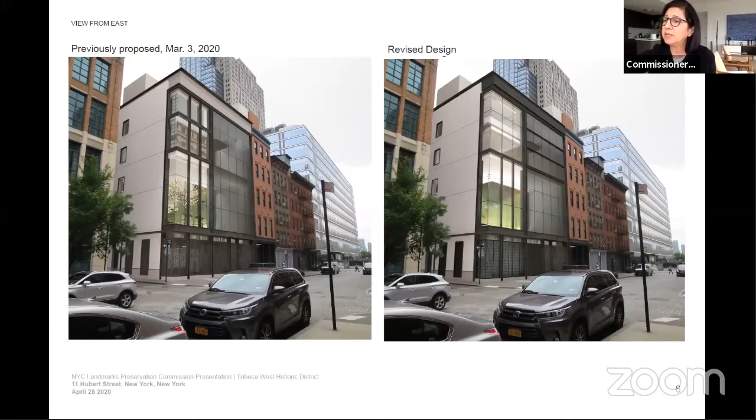I especially think if you could go to page 8 for a minute, look at it from this perspective—one back. You can see not only the improvement in the cornices and the relation between the two buildings, but also the now interesting articulation in the facade that just wasn't there, that we were persistent about. I want to thank the applicant for trying again and succeeding. I also think the shutters at the base work better and speak more to what's going on above. So that's it, thank you.

Commissioner Jefferson: I can approve it. Commissioner Gustafson: I can approve it as well, nothing to add.

Just to note for the record that Commissioner Shamir-Baron has left for the day, so she's no longer here for this or other items. So I think we have a consensus for an approval. Commissioner Holford-Smith, would you read that motion?

Sure. In the matter of LPC 20-04556, 11 Hubert Street in the Tribeca West Historic District, a garage and office building designed by Dietrich Wortmann and built in 1946 and altered in 1990.

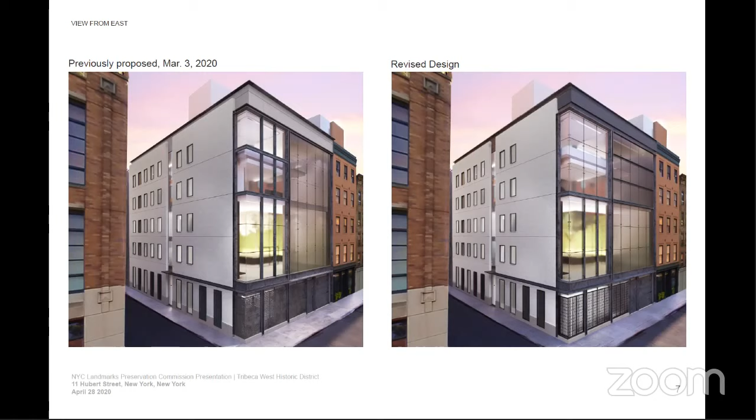Sarah, we need a second. Commissioner Devonshire, would you second that motion? I'll second that, Commissioner. Thank you. And Rich, will you call the vote?

Chair Carroll. Aye. Commissioner Bland. Aye. Commissioner Chapin. Aye. Commissioner Chen. Aye. Commissioner Devonshire. Aye. Commissioner Goldblum. Aye. Commissioner Gustafson. Aye. Commissioner Holford Smith. Aye. Commissioner Jefferson. Aye. Commissioner Lutfy. Aye.

Okay, 10 in favor, none opposed, the motion carries. So that's approved. Thank you. We'll move on to the next item.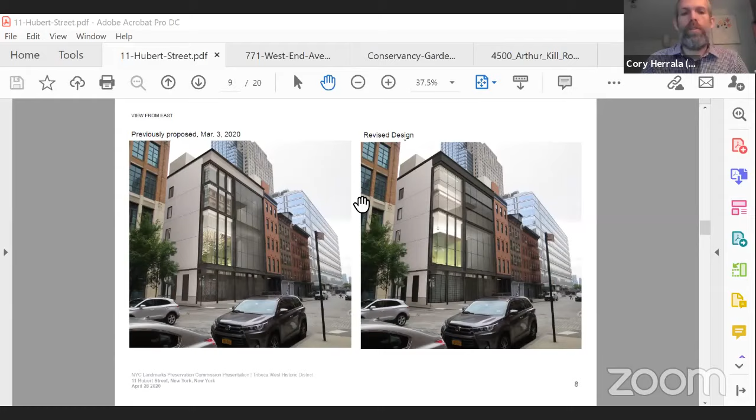Thank you, commissioners. The next item is number 4, LPC 19-40189, an application for a certificate of appropriateness in the Borough of Manhattan, block 1887, lot 50, 771 West End Avenue in the Riverside West End Historic District Extension 2, a Renaissance Revival style apartment building designed by Schwartz and Gross and built in 1914-15.

The application is to establish a master plan governing the future installation of windows. This was last presented at the public hearing of November 12th, 2019, and no action was taken at that time. The commissioners had mixed responses, with some supporting the proposal as presented with 1/1 double hung windows to match the current building standard, some supporting the 1/1 configuration but not the color, and others supporting the color but not the configuration. A few could only support matching the historic condition, which the staff could approve. Because there was not enough support for any approach, the applicants were asked to review these options and consider modifying the proposal. While no changes have been made, the applicants have additional information to present in order to clarify their proposal. The applicant team will now present their response after we open the proceedings.

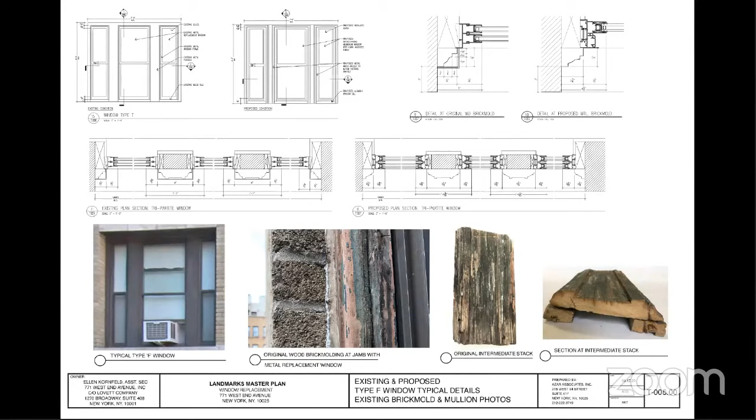Thank you. Let me just go back here, and we have control of this now. Correct. Yeah, so if you just click on the screen, you can use the arrow keys to advance the slides. Thank you.

The commissioners expressed some concerns regarding the configuration and the finish. There was also some comments regarding a realistic timeline for the replacement of windows overall.

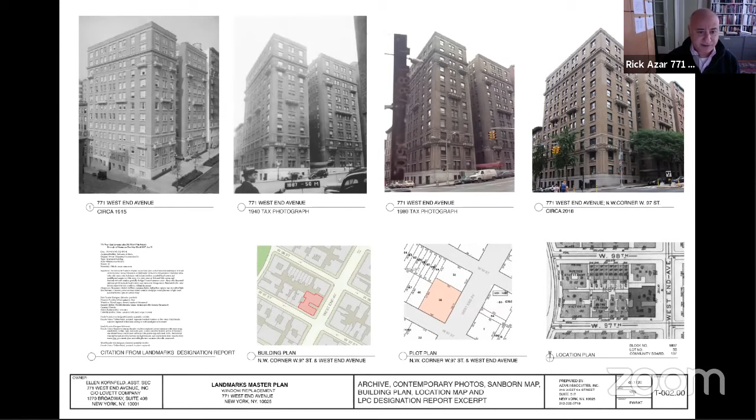Here we have some photos of 771 West End Avenue at the far left. At the time of completion in 1915, we can see the original windows had a multi-pane upper sash with an articulated brick molding, all finished in white. Immediately to the right is the 1940 tax photo, where we see that the windows have been painted a dark color, a dark hunter green. The photograph to the right of there is the 1980 tax photo, and we can see a majority of the windows have been changed to a 1/1 double hung window. And at the far right, a photo from 2016 of 771 West End Avenue.

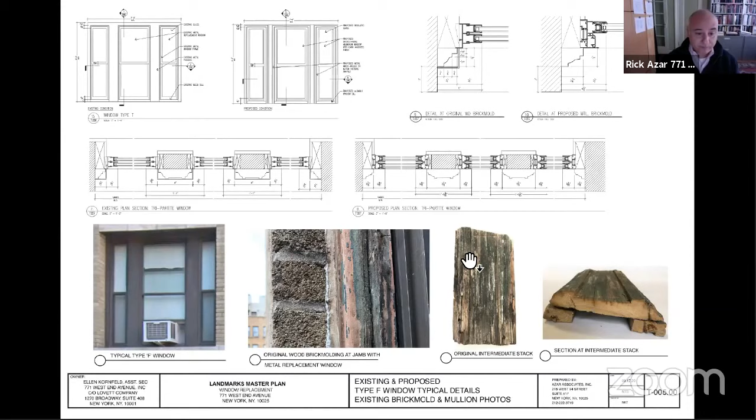There were three buildings we'd like to cite here, three recent COFAs issued by the commission. The first is 150 West 79th Street, a Schwartz and Gross building, with a COFA issued in July of 2019. The original multi-pane double-hung windows were proposed to be replaced with a 1/1 double-hung aluminum window, and the COFA was issued for the window master plan. The commission found that this kept the fenestration uniform, that the historic windows were not present at designation, and that the proposed 1/1 windows are in keeping with the historic in terms of operation and finish. While not matching the historic multi-pane configuration, the proposed 1/1 configuration will be consistent with other buildings of this type, style, and age. Lastly, the configuration of the windows was historically a less prominent component of the design, so the proposed 1/1 windows will not detract from the character of the building. We felt this was very much the same for 771 West End Avenue. Next page, please.

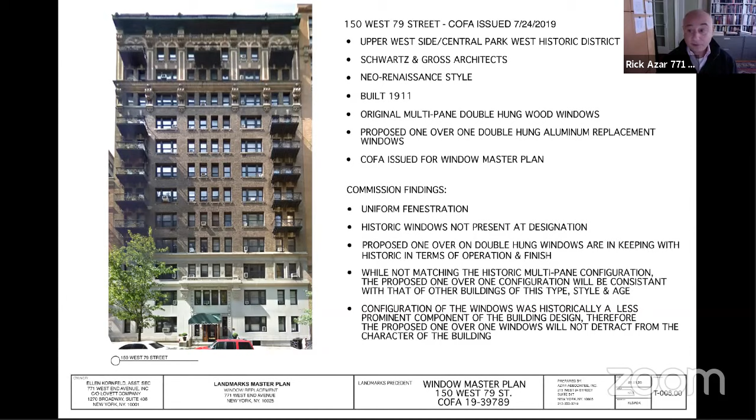In late November of 2017, a COFA was issued for a window replacement as a quote-unquote one-off in the building, but we think it's noteworthy to see what criteria the commission used to approve it. Again, it's a Schwartz and Gross building; a multi-pane wood double-hung window was the original, with proposed 1/1 double-hung aluminum replacement windows. The commission found that the historic multi-light windows had been replaced prior to designation with 1/1 metal windows with a bronze finish. The proposed 1/1 double-hung windows will recall the historic in terms of operation and details, and the proposed bronze finish will harmonize with the remaining windows throughout the building, consistent with the historic finish on a building of this size and age. Lastly, the proposed 1/1 configuration will match the remaining windows throughout the building, maintaining uniformity of fenestration. Please turn the page.

The last citation is 370 Riverside Drive, again a Schwartz and Gross building, with a COFA issued just this year in February. Again, original multi-pane double-hung windows were replaced by a proposed 1/1 double-hung aluminum window, and the COFA was issued for a master plan on the proposed window. The commission found that this kept uniform fenestration, that the historic windows were not present at designation, and that the proposed 1/1 windows are in keeping with the historic in terms of operation and finish. The proposed profiled metal molding will replicate the historic wood brick molds in basic profile and design. While not matching the historic multi-pane configuration, the proposed 1/1 configuration will be consistent with other buildings of this type, style, and age, and will allow a return to a more uniform fenestration pattern in a more timely manner than if a multi-pane configuration was required. So we can see a pattern of sensitivity on behalf of the commissioners regarding these window replacements.

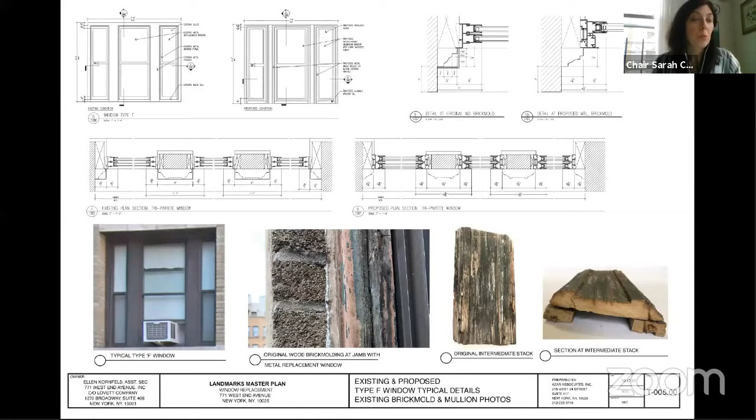I think the applicant presented in support of his request for 1/1 windows at this Schwartz and Gross building. He showed other Schwartz and Gross buildings where the commission has approved 1/1 to support that. But I think what that also shows us and reminds us is that the commission has long thought about these master plans for window replacement and has had varied approaches over the years.

Historically, the commission routinely approved 1/1 where the majority of the historic windows were removed prior to designation. And we approved 1/1 in master plans with the goal of getting uniformity back, in exchange of the historic configuration, and better profiles and a better finish.

More recently, for many buildings, we've started to take a longer term view, and for master plans, even where the majority of windows have been removed and replaced prior to designation, have only approved master plans that require the building to put in the original configuration, even if it's going to happen over a long term. To deal with that inconsistency, the commission has really been thinking about how to be fair and consistent, how to apply consistent standards.

So we've started to think about the criteria in a more nuanced way. One of the things we've been thinking about is: does the building's design, style, and details depend on the original configuration, or does the building have enough detail and ornament to express the style, making the window configuration less important to the style?

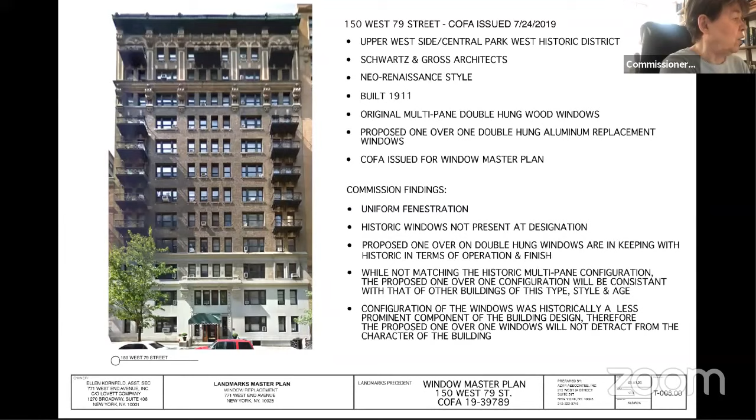I recommend approval, finding that all the historic multi-light windows, except for the windows at one stairwell bay in the deeply recessed entry court, were replaced with 1/1 double-hung aluminum windows with a brown finish prior to designation, resulting in a near uniform appearance. That the proposed windows will recall the historic windows in terms of operation and details, and will restore the profiled brick molds, which are currently concealed by flat panning. That the proposed 1/1 configuration will be in keeping with the configuration of historic windows often found at Renaissance Revival style buildings of this type and age, and that the design of the building's facades, featuring ornamental terracotta string courses, bracketed balconies, and cornices, can support a simplified window configuration.

And the establishment of a master plan will support the uniformity of the building's fenestration over time. However, I recommend that the staff work with the applicant on the proposed color of the enamel finish so that it will harmonize both with the existing windows, but be consistent with other historic finishes found on buildings of this age and style. Thank you.